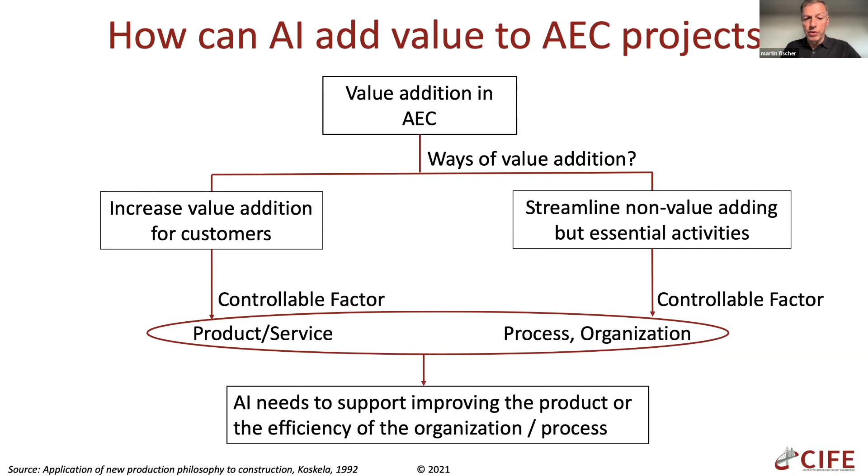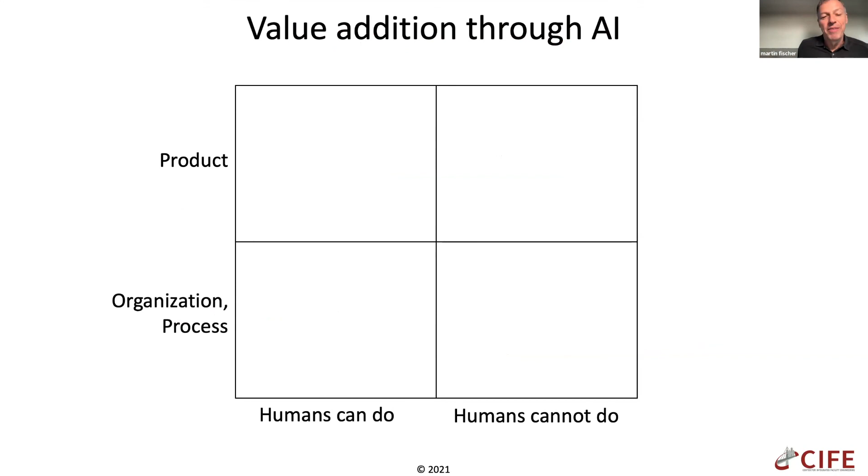If we put this into a 2x2 matrix, that's what you get when you work with businesses. Put product, organization, process there, and maybe slightly provocatively, but also so it's simple and easy to remember, and also fits in a reasonable size font, what humans can do and what humans cannot do. Of course you might find a human that can do it, but what I mean by humans cannot do is you cannot easily do it every day on your projects. So if you put those together, we already have products that humans can do that already exists. The improvement opportunities for me are really in the other three boxes. We can execute our work more consistently, more efficiently through the help of AI.

That's, I think, a huge potential here. We can think of new and improved processes that are really quite challenging or almost impossible for humans to do, and we can also imagine new products or improved products.

I'll give very quick examples of these three boxes, starting in the lower left corner, because that's what brought me over to the US, to the West Coast, where in the mid-late 80s, AI was going to take over the world any day. So I wanted to be there and learn about that.

This is a project I worked on as a young engineer in Rhode Island, actually for a Swiss company, VSL. What struck me there was the lack of construction knowledge considered during design, leading to a redesign effort so the bridge could actually be built. While that was an interesting experience for me, it really delayed the project.

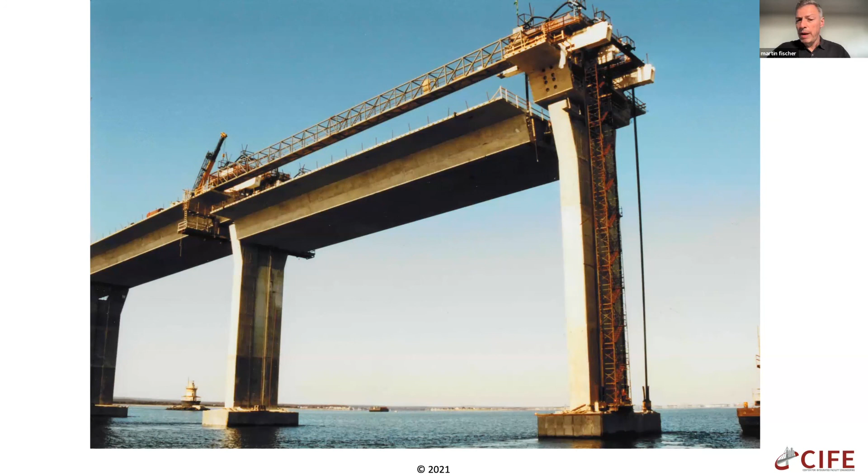This mapped well with the large focus of AI at the time, which was creating expert systems, applying existing knowledge broadly and consistently across discipline and phase boundaries. So one of my first projects at Stanford was to build a bridge design advisor so designers could understand construction knowledge. That, as we all know, proved to be a little too brittle.

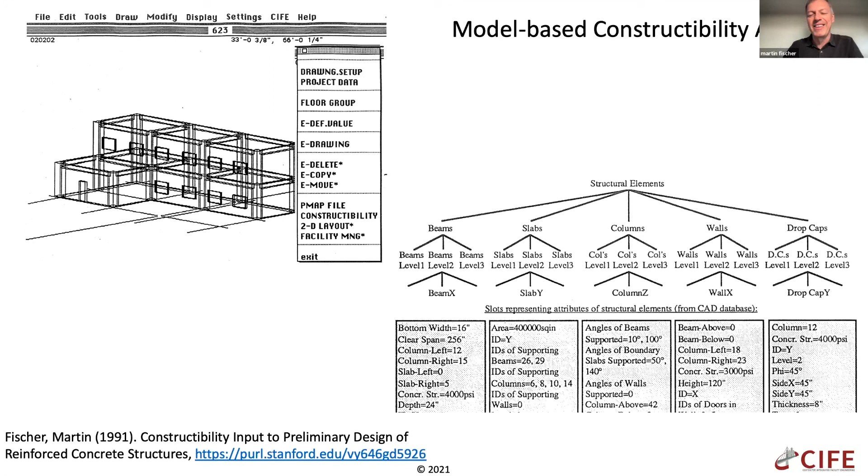This got us into model-based reasoning, where we started to build data structures that could be filled with project-specific information. The feedback system became less brittle, and the feedback was more useful. This is a quick glimpse from the beautiful graphics we had at the time in my PhD work.

This model-based reasoning was quite helpful, but we quickly realized it was actually the time dimension that mattered a lot, so we had to get into 4D models, because the static 2D and 3D models used at the time again proved too brittle to be applicable.

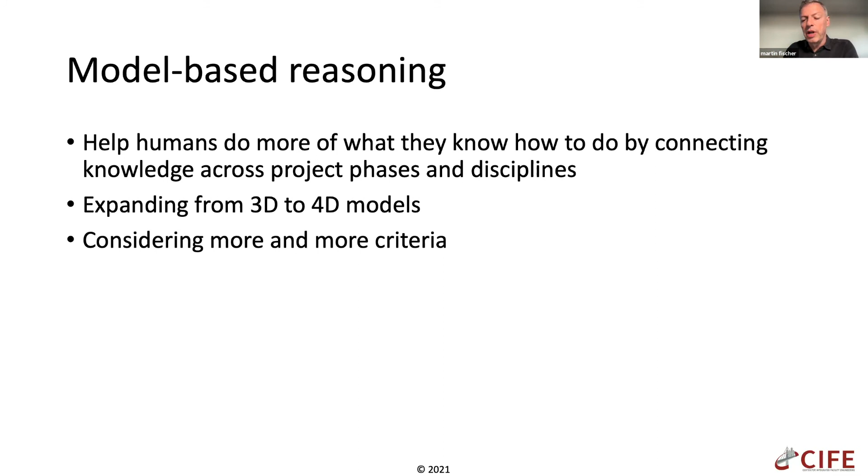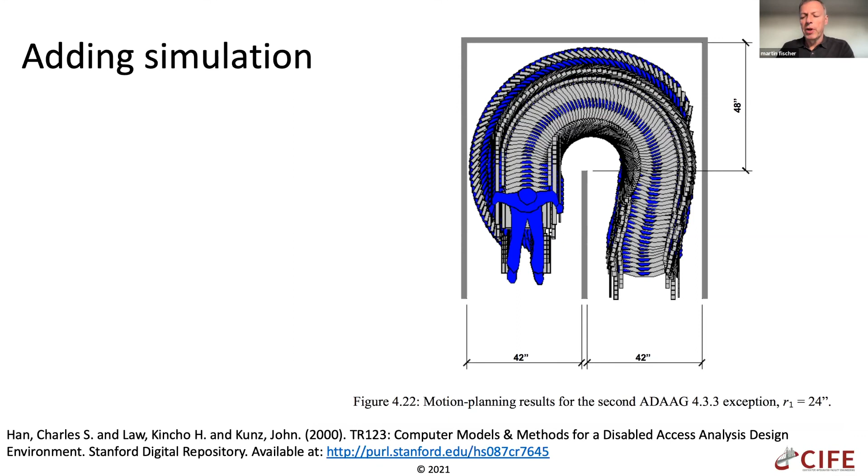But it allowed us to formalize our domain knowledge, something Ian mentioned, and we could start to think about looking at many more criteria that we consider today incompletely or too sequentially. Eventually we could add simulation - the work from Chuck Han 20 years ago, doing performance-based analysis of a building design for disability access, which now is much more common, but at the time quite revolutionary.

So reflecting on the big difference between the early days of AI applied to our domain and today - basically the big difference is we have data. Well, we're starting to get some data, at least I'll reflect on that. We still find it quite challenging to get a really good data set, but there is increasingly better data available, and that really changes a lot of things.

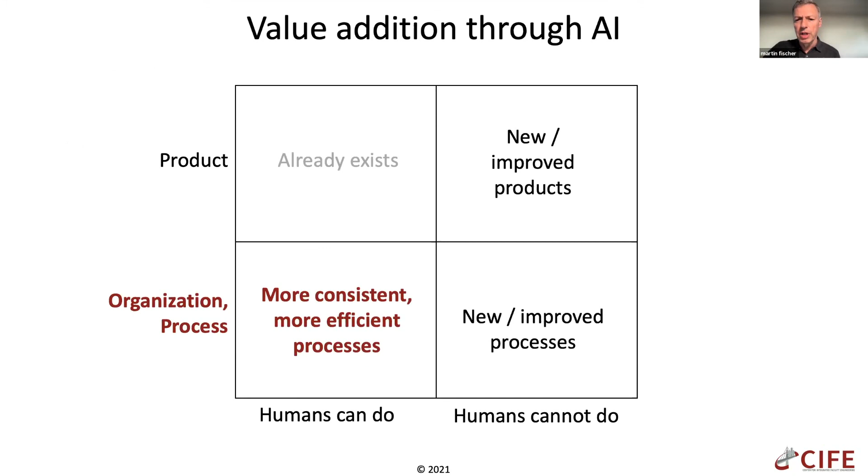If we look at some more modern examples of how we can add value through AI, an example of how we can carry out processes more consistently and efficiently is this scan-to-BIM work from a few years ago by Iro Armeni.

We know how to make a BIM from a laser scan - people are perfectly capable of doing that, doing it all the time as we speak, probably. But it takes quite a bit of time. At the time when we did the work, it took a human 3 work weeks to create a detailed BIM for a 100 square meter building area. Maybe some people can be a little faster, but still, that doesn't give us access to a lot of BIM of existing buildings very rapidly.

So by automating that process, we can free up humans to do something else. We can create better information for projects, for existing buildings in particular, or as construction progresses, more consistently and rapidly, that is valuable for the many other things we want to do. So turning something we know how to do into an automated process can really have huge benefits.

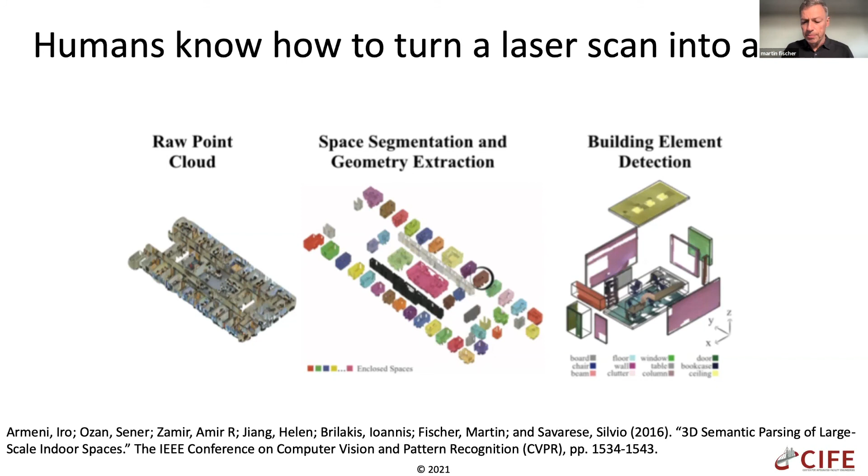Similarly, we have aspirations of better, improved products, but we as humans have a difficult time getting there because there are simply too many options to consider. And that's where AI-based methods can help us.

For example, illustrated in this system we built together with the largest wind farm builder in the US, Mortenson, worked by Forest Flager in my research group a few years ago, where we wanted to optimize wind farms for production output and construction costs. Those have been separated because the wind farm developer had the wind data and the contractor had the construction data, and they didn't really share that with each other.

But they wondered, could we build a wind farm that is equally as good at producing electricity with less investment costs, because we are smarter about placing the towers? Sometimes a tower will be placed in a difficult to reach area that increases construction cost significantly, when a nearby, slightly less advantageous tower position, but much cheaper to build, might have been available.

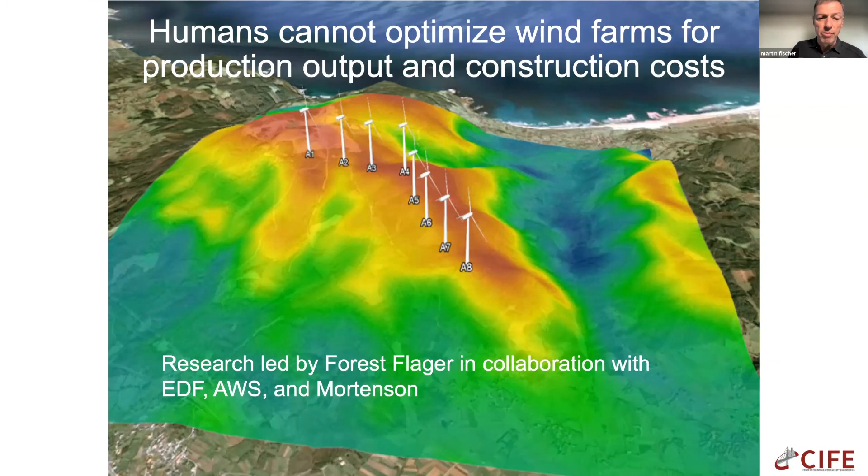So we did a retrospective study looking at a large wind farm in northern Texas. You see here the distribution system they need to build. The dots show the wind towers where they were placed. The gray area shows the land area that could be used. We're talking here many, many kilometers long and wide.

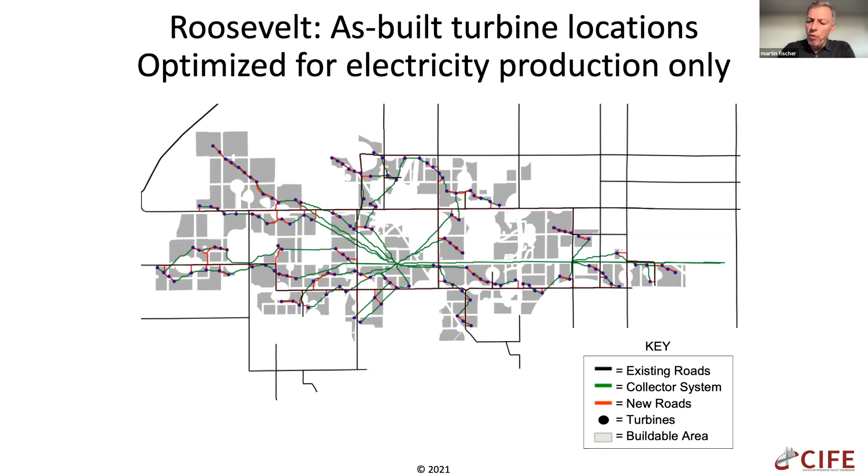When we brought these data sets together and applied optimization methods, AI-based search methods and so on, we could then show the project team that if they had worked together from the beginning using these tools, exploring the many feasible options, they could have built a wind farm that used less area for less money with the same electricity output.

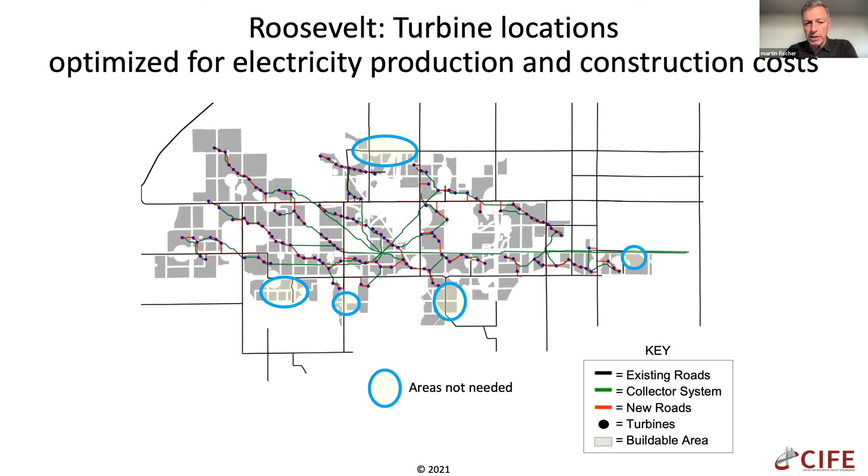Specifically, we could show them that they could have saved 8% of invested capital and needed 10% less land. This was very attractive to them, and as far as I know, they started to work together, share data, and pursue project opportunities together.

This is something that would be really difficult, if not impossible, for humans to do, to think through in the time frame you have when designing a project, to go through the many options, the what-if scenarios, and figure out the drivers of performance, for example through parallel coordinate plots like Ian showed. So AI tools are extremely helpful for us to add more value by creating better products.

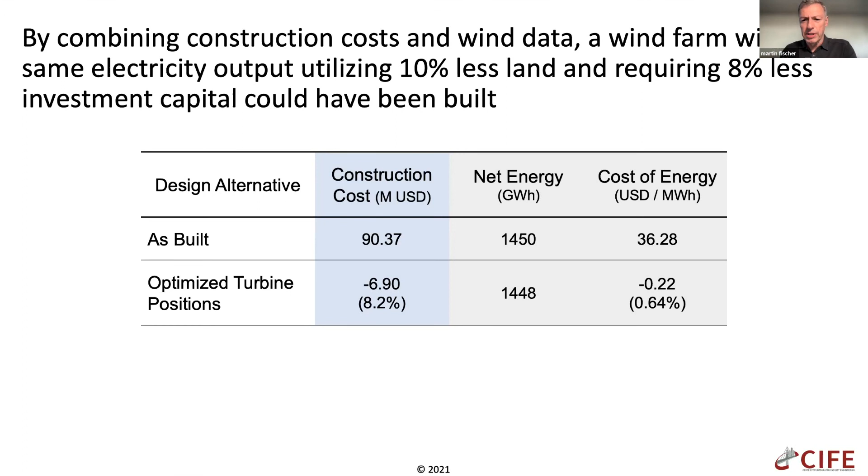And I want to share a couple examples of new and improved processes, because I think here we see a lot of potential. For example, the work of René Morkos, now commercialized in the automated scheduling tool Alice, where we were able to work with a project engineer and project manager on a very large parking garage.

Over the course of a 3-day workshop, we collected his domain knowledge and combined it with the scheduling algorithms we had developed in the research group. Instead of creating one schedule, as is typically done in 3 days, we looked at the 4 construction strategies this project manager wanted to explore and understand, giving him a much better decision basis for his project.

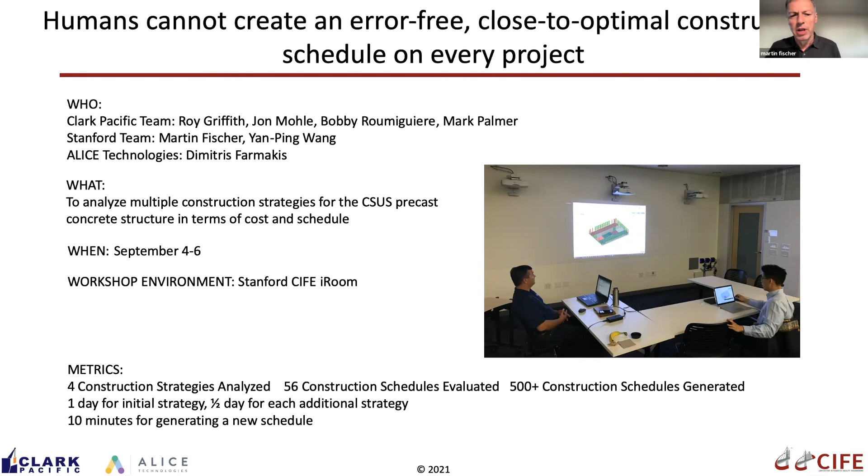So basically, this method forces you to be very clear on what are the general methods and algorithms you apply to scheduling, and what is the project-specific knowledge that matters and how to formulate that, so that the AI tool creates schedules that are actually believable. This is what I wanted to find out.

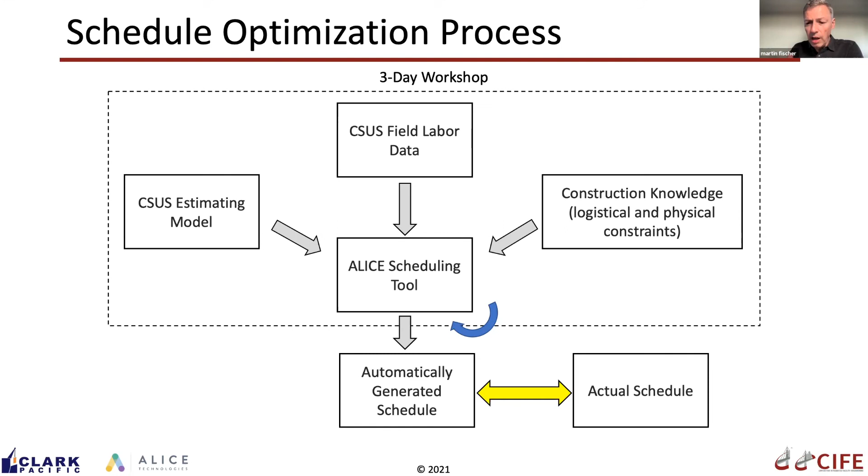Does this very experienced project manager believe the output of this automated tool as much as if he had made the schedule himself? After a day of working with the system, he did. He found it extremely powerful to work through different scenarios and understand the implications on crane needs, crew needs over time, and the particular management challenges each scenario or strategy would involve.

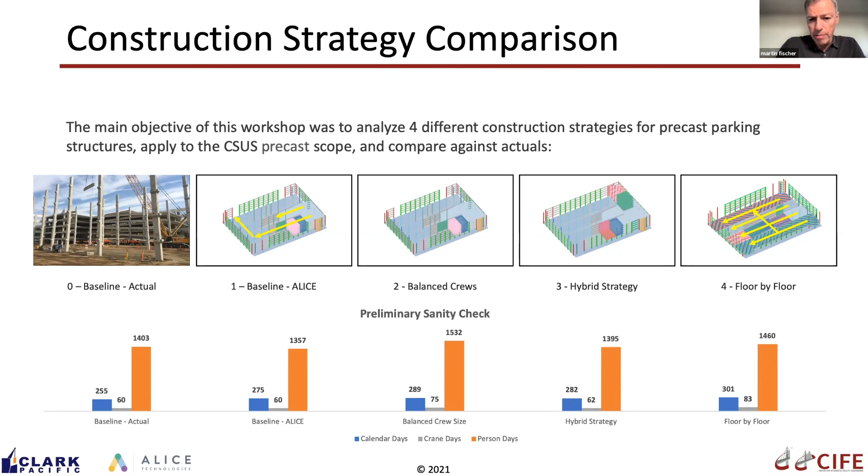Later on this project, as it was under construction—again, this is basically impossible for humans to do. In all the years we've done scheduling research, we have not found a single schedule that didn't have errors, some basic errors, never mind being good from a perspective of multiple concerns like short duration, consistent crew use, etc.—in other words, schedules that couldn't be improved quite significantly. So I think this is something humans have a difficult time doing by ourselves, and these tools are extremely helpful for us to create better resource allocations on our projects.

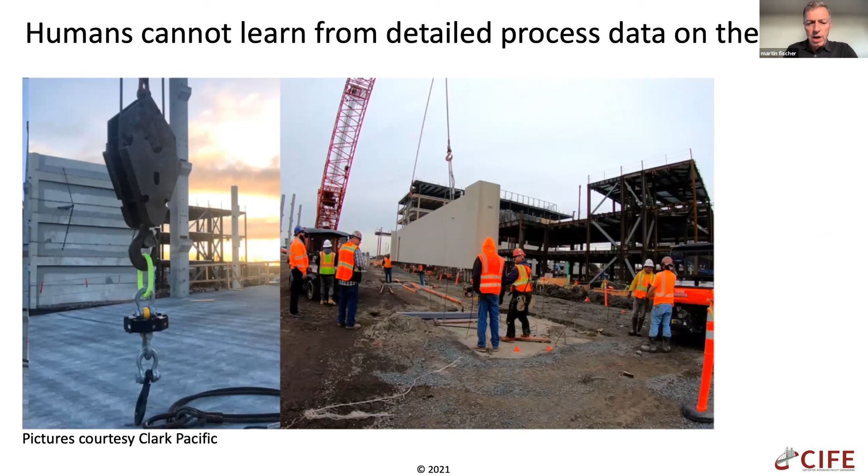We were excited that we could learn about each step of the construction process by leveraging data from a crane hook from a startup called Versatile that gives us detailed data on every cycle time of the installation of this project, giving us a huge amount of data that would be basically impossible for humans to filter through and make sense of.

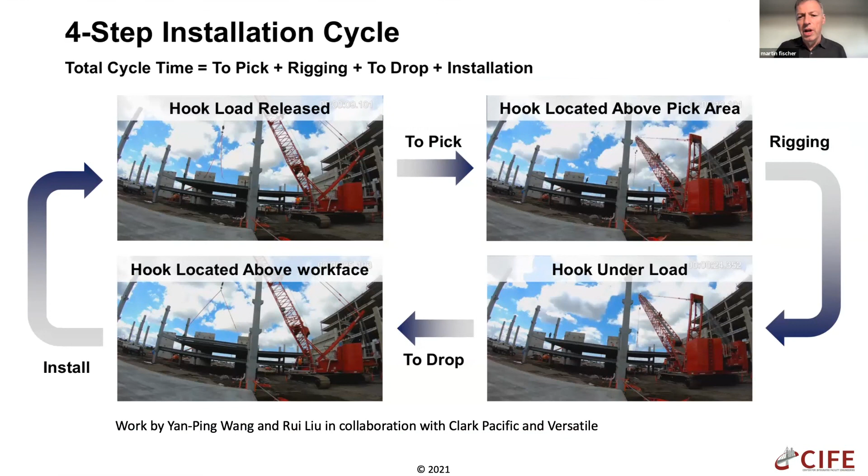For a few components, we were stunned by the level of variability that exists in installation, something the Lean community always alerts us to pay attention to. Here we finally got some actual data showing the shear wall installation on the ground floor varied by a factor of 5: the fastest was 23.5 minutes and the slowest 111 minutes. Same shear wall, same project, same day. The difference was really the quality of the preceding work.

We then got this data as the building went up for every component, for every condition of work. This became extremely helpful for us to understand what drives the average performance and what drives the variability we see in the work.

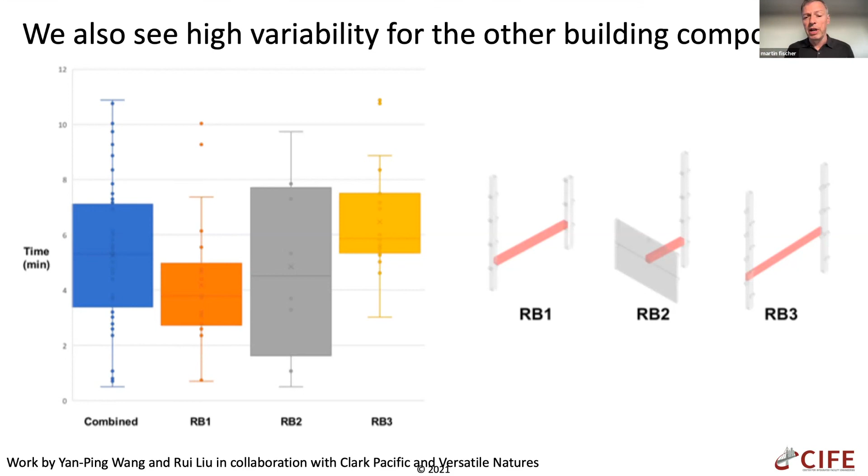We then wondered, could we have managed the project better after the fact? Could we have predicted better how long the work next week would take if we had used this detailed data? This we presented a few months ago at the ENR Future Tech Conference.

We also had access to another project with the same kind of data, and we found it very helpful not only to show heat maps of where the variability is highest on the project, but to simulate different scenarios in terms of the quality of predictions made using day-to-day operation-by-operation data versus the average production data that is used today.

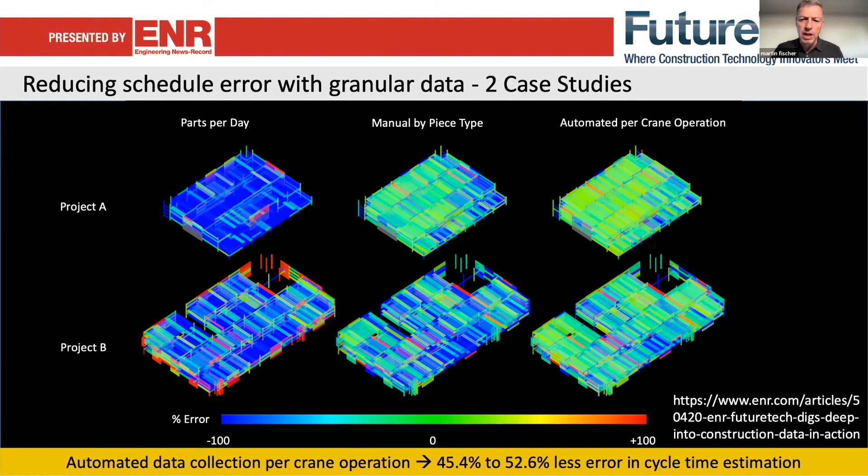What we found, for example, is that the contractor could have planned to install 7 more parts each day with a 90% chance of achieving that scheduled target if they had used the detailed data. Of course, we don't quite yet have the management method to use this detailed data, but that's the potential we see on the horizon.

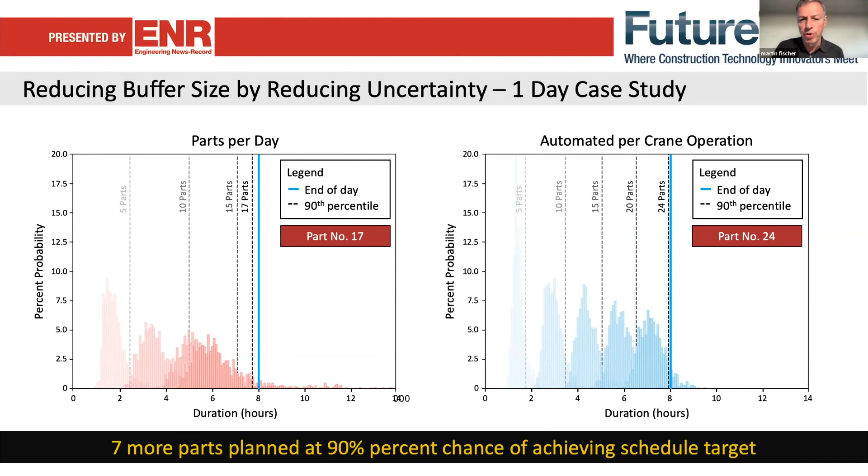The other thing we're finally seeing here is actually data we can largely trust. There are still some errors in there, but compared to what we've seen otherwise, it's a huge improvement in data quality, and we're seeing this happen across the industry more and more.

A few months ago, we were able to be part of a test using Spot to collect data on a project, and I think it opened everybody's eyes to what you can do when you have consistently collected, comprehensive data on what's going on at a project.

It allowed the project team to slash the payment cycles, which was very attractive for their accounting and back office functions and also their contractors, and to do production tracking, air quality monitoring, and quality control all with the same tool collecting the data—which would have otherwise required different people walking through the site with different sets of eyes, seeing some things, not seeing others, basically not getting this comprehensive data set.

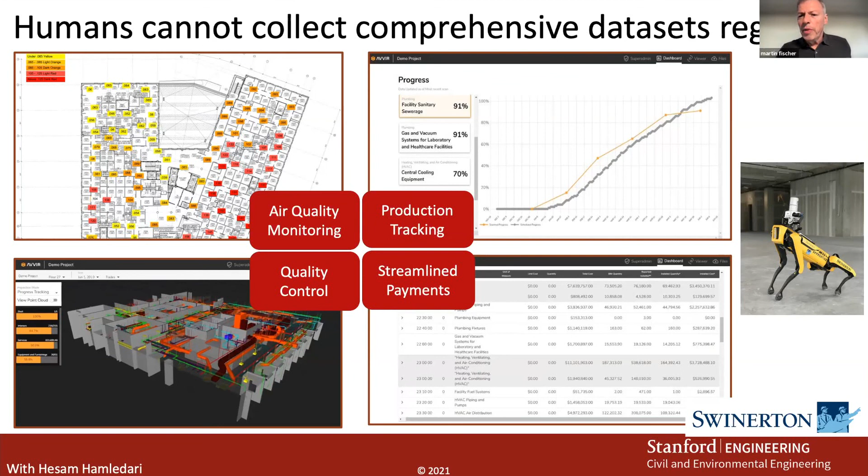So hopefully I was able to illustrate how a quite wide range of AI-based methods allow us to add more value, through creating better products, executing processes we already know how to do more often, more consistently, more efficiently, or thinking of new and improved processes.

But we have to bring all of this into an organization, and Ian pointed out very well the challenges of doing so. In our experience, we have to see what the organization is willing to accept—what level of AI performance is actually helpful.

Because if we get 90% accuracy, the AI people are happy, but construction people are not happy—though you can still do something with that. We've found it's quite a challenge for organizations to truly understand what AI-based systems can help them with, and what they still have to do themselves.

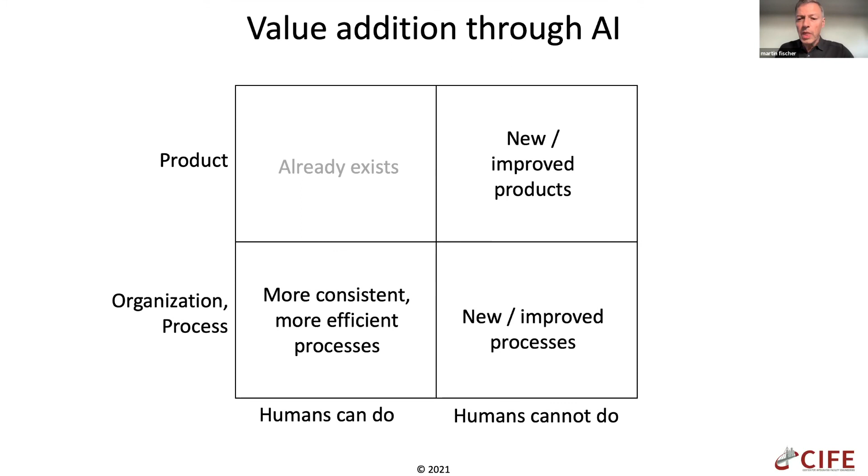We saw this done quite nicely in a project with Louis Berger, now WSP, and Aerial Insights, where we tested whether we could prototype a drone-based, and then automated drone-based, inspection system for highways, coupled with automated recognition of defects, to help this operational team.

This team running this organization running this highway was very motivated to find a better way of managing this project, because if there is a problem on the road, it presents a life safety issue, as Ian pointed out. There were very stringent requirements from the Department of Transportation.

In particular, they assumed it would take quite a while for a defect to be found, and then they had an extremely short window to fix it. Basically, they required that every defect found had to be fixed within 24 hours. This led to a huge inventory of material and signs, etc., that the operator had to have on hand.

Otherwise they couldn't fix it in 24 hours, which is quite a cost. So they were wondering, if a problem could be found right away, could the time to fix it, depending on the type of problem, be a little more relaxed, and could you then move from a reactive maintenance regime to a proactive, predictive maintenance method, which has been shown by many others to be much more advantageous.

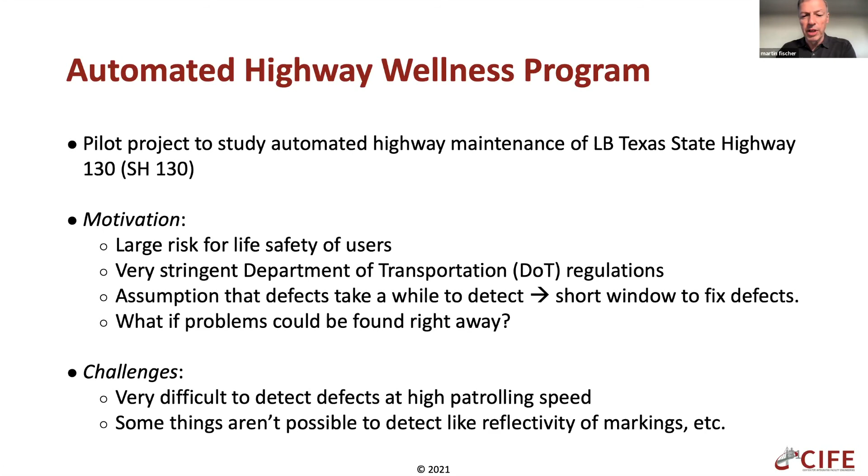So we were able to show a prototype system that could automatically collect data comprehensively, like we saw before, see things humans can't see, and then analyze that data automatically and highlight the defects, and also show when a defect started to happen.

This provided a much better information basis for this operator to work with its client, the Department of Transportation. In our observation, stepping back, this worked because in the operator's organization, there was something in the system for everybody. The operations manager saw better allocation of resources and better service to the client, and the maintenance staff was happy because they had more predictable work hours and conditions.

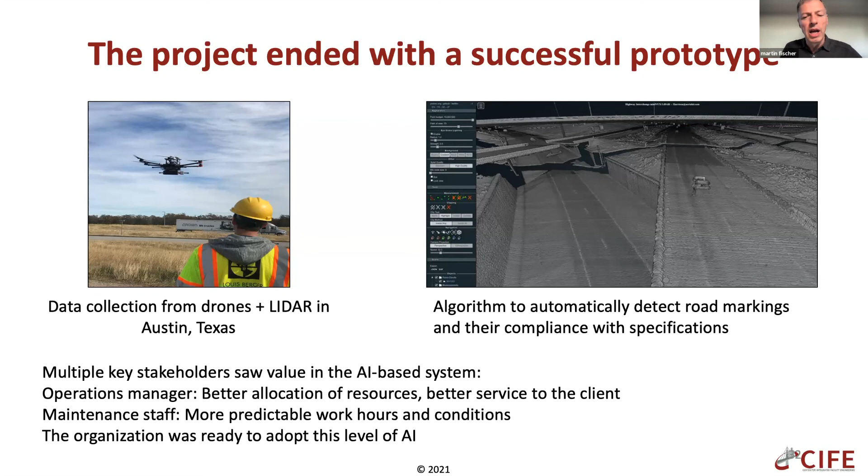So this was a successful adoption of an AI-based system in an organization. We have seen many unsuccessful ones, where the different parties in the organization were not aligned on the value of the AI system, or the expectations of the AI system were too high.

This leads me to a few concluding comments, because we found, as we work with organizations around the world, that business leaders often still struggle to articulate the added value they seek. What insight should AI give? What decisions should AI support? What questions should AI answer? There are often unrealistic or fuzzy expectations of what AI can do.

They're enamored with the methods, and the methods are important, of course, we have to understand them, but first and foremost we need to know what the system should help us do. Hopefully my examples have given you some ideas there.

The other thing we consistently find is that good quality data sets are still the exception. It's difficult to connect different data sets, but that's when you really find value, when you can connect a schedule data set with an estimating data set, with a BIM, with a contract data set. But aligning and connecting them is still extremely challenging, we found.

We find, and Ian also pointed this out, that data sets use inconsistent labels across organizations. Automated data collection changes this a lot, as I mentioned. We find that we haven't gone back and said, this was a great design, this was a really good cost estimate, etc. We don't have those labels, so how we will learn from those, I'm not so sure.